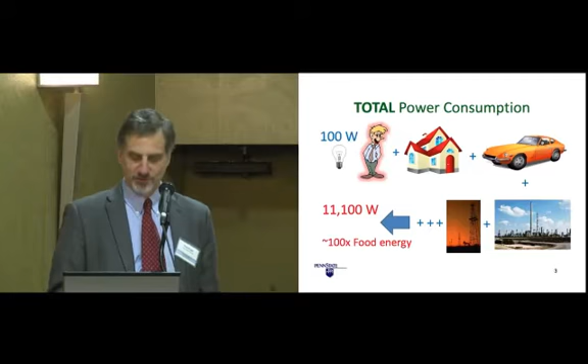So just think in terms about the food that we eat. If we were trying to do a real food bioeconomy, we'd need to grow 100 times more food in very rough terms. So what we've been doing is researching technologies that make use of the wastes we already make. These are microbial fuel cells, and the idea is that with no moving parts, we can convert organic matter into electricity. The only moving part in this case is that fan. There's no moving parts inside that microbial fuel cell.

And what's really inside there are just bacteria that are able to break down organic matter. Like you and I, when we eat, we breathe, we capture electrons out of that food, and then those electrons flow through our respiratory enzymes, and we make energy, and then we release those electrons to oxygen. We keep bacteria in a situation where they can't get at the oxygen, and so they can break down their organic matter and release those electrons to an electrode, where they flow through a circuit to the cathode. It's a thermodynamically spontaneous situation.

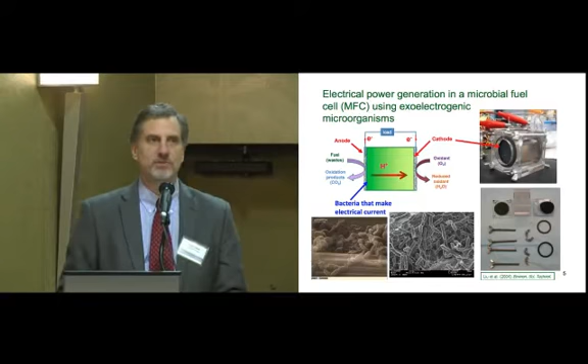And we can develop reactors that are very simple. This one, sort of like the average test tube of our laboratory, is more like 2 electrodes in a tube. It's very, very simple. Now, we've talked a little bit about the energy for wastewater treatment. We've gone in the direction of using more energy for wastewater treatment, using more energy for drinking water, due in part to using membrane-based processes, taking nothing away from Perry's talk today, which I thought was excellent.

But there's also a lot of energy in that wastewater, 2 to 5 kilowatt hours per cubic meter. And if you also look at the energy difference between a typical freshwater and seawater, there's probably another 0.75 to 1 kilowatt hour per cubic meter. Now that's not a high energy density, but we have a lot of water. And I'll talk also about creating artificial salinity gradients using waste heat.

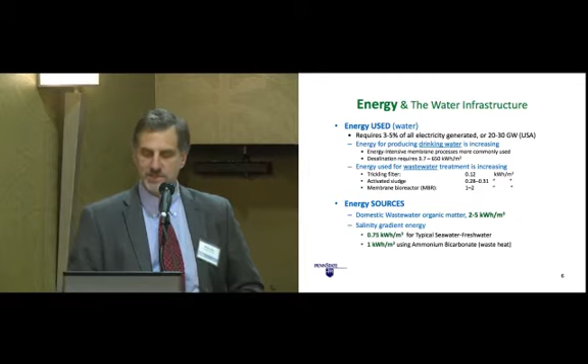Now, these are revolutionary ideas, and every idea goes through what they say is 3 stages. The first one's that of denial. It can't be done. And then, hopefully you work on it a little bit more and they say, well, it's possible, but it's not worth doing. And then you hope you get to the 3rd stage, which is where they say, I said it was a good idea all along.

Perhaps this has happened with different water technologies. Reverse osmosis membranes: nah, that's never going to work, too expensive. Membrane bioreactors: that's a foolish idea to put membranes in wastewater. That'll never catch on. And maybe microbial fuel cells will be that next area.

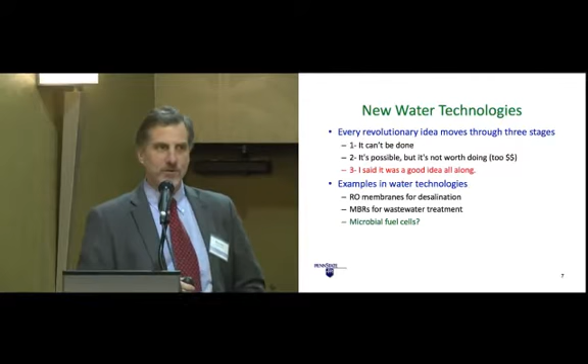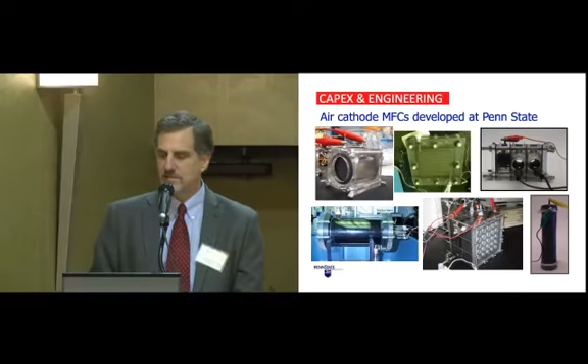So what I want to do is zip through some of the technology advances which hopefully will make this possible. We've made a lot of progress in the past few years, and so I want to give you a sense of that. We've built all sorts of these systems, looking all different ways, and here's what we've come out with in the end. Ways to make a very inexpensive architecture.

Some papers were written talking about how we needed to get these costs down below 100 euros per square meter or $150 per square meter, and we've done that. You start with the tank. I'm not going to put in the cost of the tank because everything needs a tank.

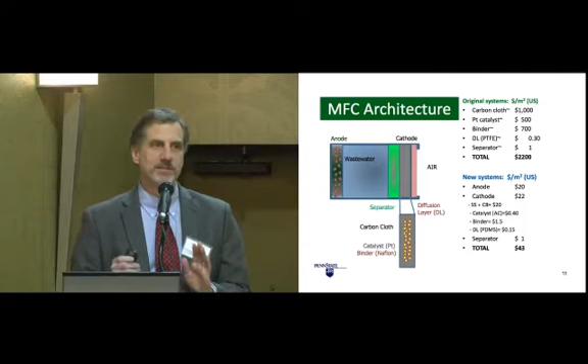You put the wastewater in that tank, an anode where the bacteria are going to grow, a cathode where oxygen is reduced. You want to have that done passively with air, and so you need something to make the water not leak out through the cathode. That's called a diffusion layer. And then you want to move your anode close to the cathode because that will create more power, but you don't want them to touch, so you put in an insulator or a separator between those two things.

Now, the cathode is probably the most expensive part of this contraption, typically made out of carbon cloth with some sort of catalyst. That historically has been platinum, and then some sort of binder, typically Nafion's been used. And so the challenge was that if you did all that, it cost you about $2,000 to build 1 square meter of this stuff, which is way too expensive.

And so what I'll do is show you that we can get the cost down to about $40 or $50 per square meter of materials, and I obviously won't go into those details, but let me convince you that we can do that. And the other thing is we got to make these things very compact. We have to put a lot of square meters of electrode per cubic meter.

And so the idea is to create different pathways for the water and very thin pathways for the air to create this sort of modular development where every square meter of module then meets with another square meter. And if each one of these is 10 centimeters wide, and you have 10 of them per cubic meter, you got 10 square meters per cubic meter, or if you got 100, you got 100 square meters per cubic meter, and so forth.

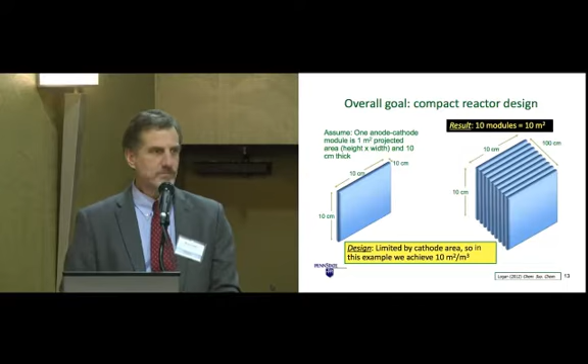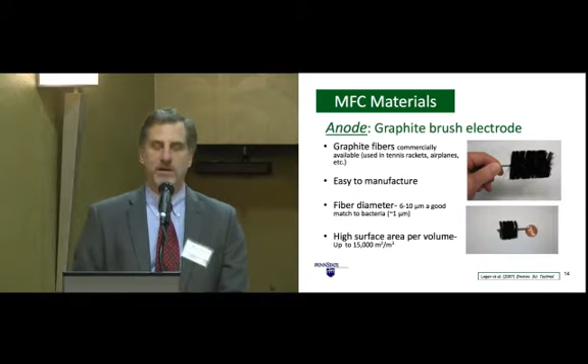So how do we make this system simple and affordable? The first was for the anode, we use something that looks like a bottle brush. It's just carbon fibers wound around a non-corrosive titanium wire. Huge surface area for bacteria, and very electrically conductive. So we can modify that design now that I showed to have these brushes about the system.

The second thing is we got away from needing to use platinum. Activated carbon, something environmental engineers know a bit about, but in a different context, activated carbon is actually a very good catalyst for oxygen reduction at the current densities that we use. And so these activated carbon catalysts work about as well as platinum on carbon cloth.

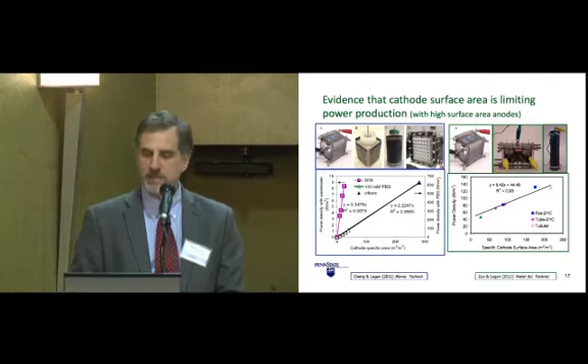The cathode surface area really becomes the critical design feature in the system, and that is that the more cathode area you put per volume, the more power that you make. And so we've shown this with a number of different systems. It's really a question about cathode area. So once you know how much cathode area you can put in the system, you can pretty much predict how much power you're going to make per volume. Let me skip that slide.

Now, activated carbon works well, but it doesn't last forever, and one of our big challenges was that over time we would see this performance for oxygen reduction creeping down, and these were some tests Fang Zhang did in my lab. She conducted them for about a year. I asked her to do this for 10 years, but she said no, so we only have a year of data.

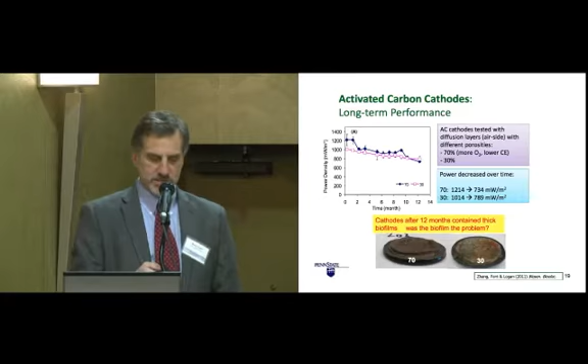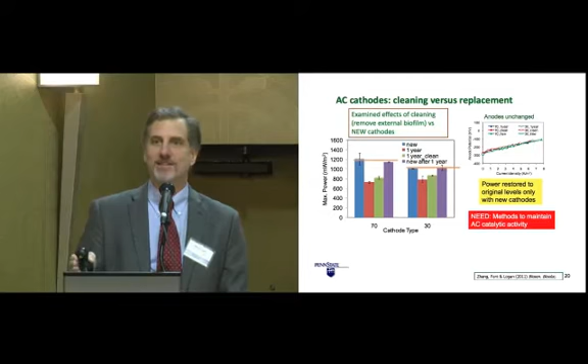And this is how the anode or the bacteria look. You don't have to worry about what's going on here, but basically this says that after 1 year, the bacteria are doing exactly the same job that they did a year ago. That is, nature, after a year, is still working perfectly. Our activated carbon cathodes, unfortunately, are not. So we need to improve, but nature has done well.

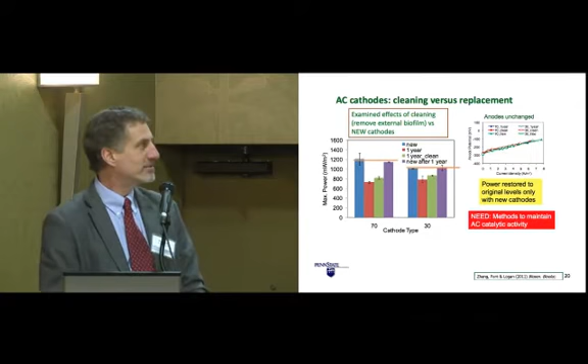So we're very optimistic about these new cathodes. The binders that people typically use to hold activated carbon or other catalysts together are negatively charged, which tends to get positive charge accumulating there, which rejects protons, which you don't want to do. We've created a new binder that over many cycles seems very stable and is actually much cheaper than the current binders. These would be the binders that would hold on the catalyst.

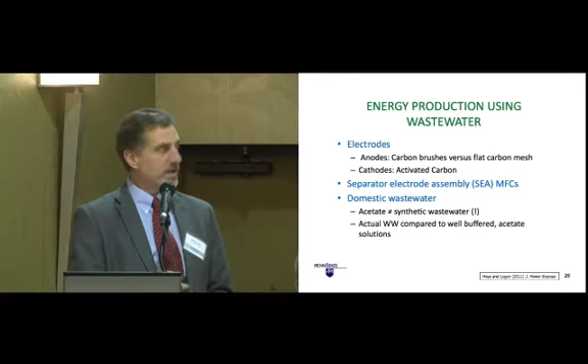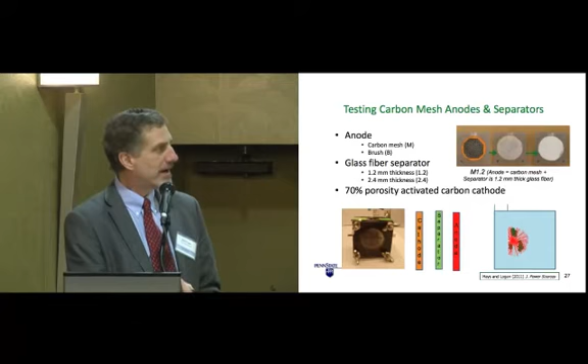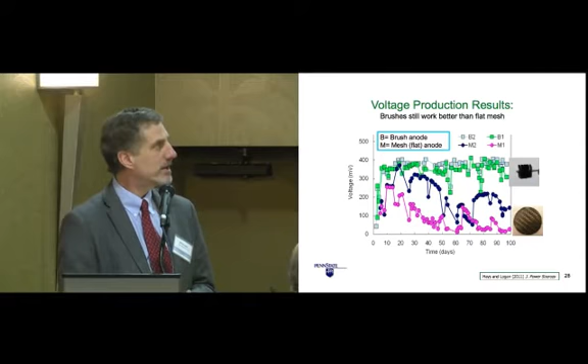So what else? Say we've done this now, we've got these materials, how well can it work on actual wastewater? So originally we looked at building one of these systems with flat anodes and flat cathodes and treating the wastewater. We compared it to our graphite fiber brushes, and we found that over about 100 days of operation, we got good continued performance out of our brushes, but this flat surface didn't work so well. So that told us two things. One is we could get good treatment on wastewater, and two, it would be stable over time.

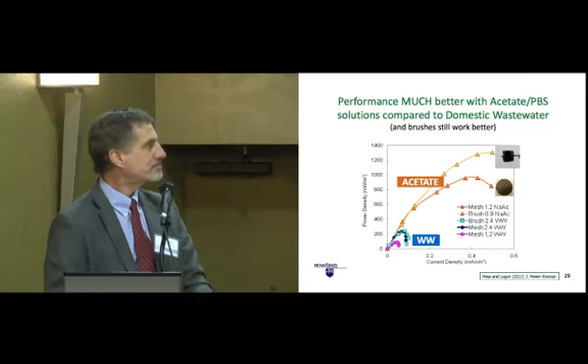However, wastewater is not acetate. Acetate gives us much more power than wastewater does. That's just got to lower our expectation about the kind of power we can get out of these systems, but we can get power out. These are some typical wastewater properties. I won't go into detail here other than to say it pretty much behaves as it should.

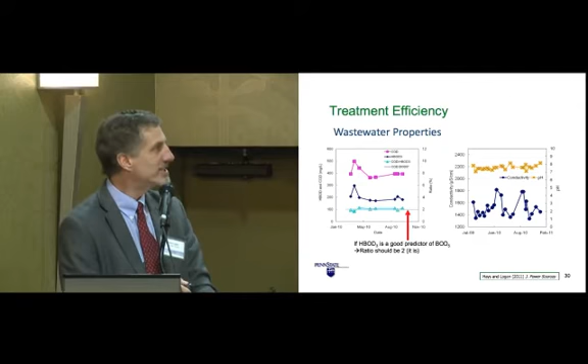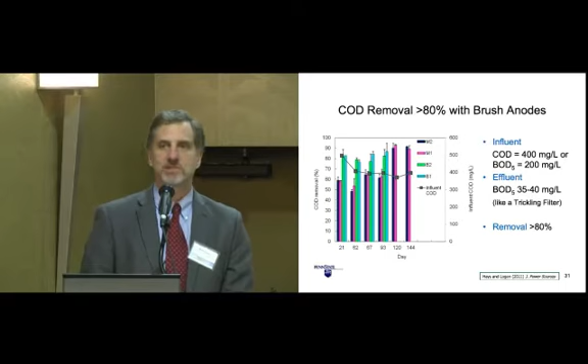And what sort of removals do we get? Well, our influent BODs are equivalent to about 200 milligrams per liter. Our effluent are not down at 6, but about 30 or 40 milligrams per liter. This is intrinsically a biofilm process, and so it behaves much like a trickling filter would in terms of getting soluble BOD out. Activated sludge gets low effluent BODs, but a trickling filter solids contact process can do the same thing. That solids contact process can drop the BOD down further. Perhaps we could do the same thing with microbial fuel cells.

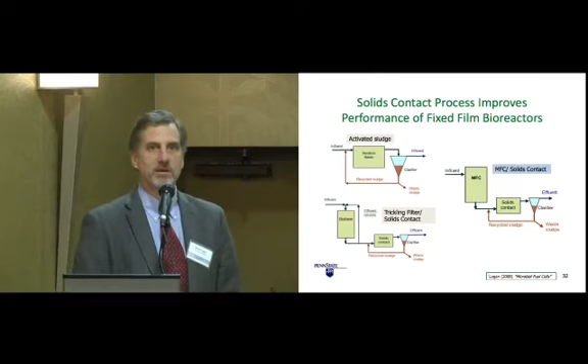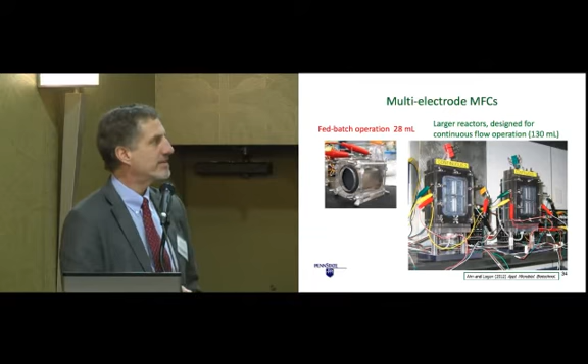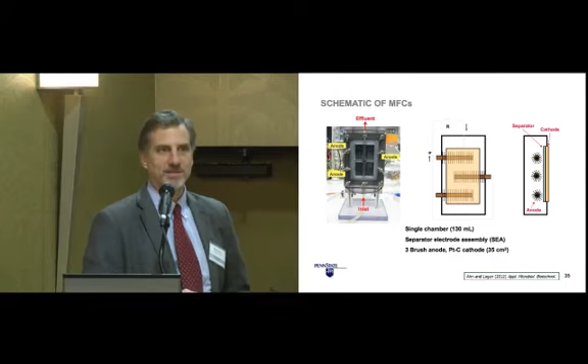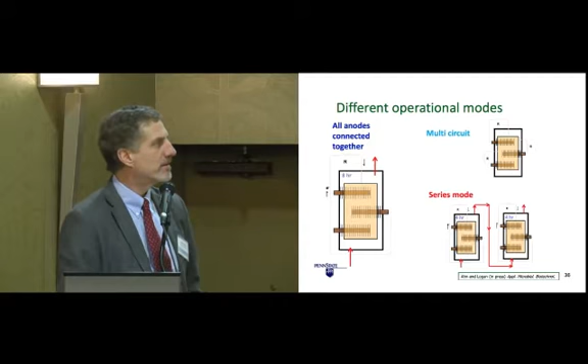And so we started to pack this reactor with many of these electrodes, and when we did that, some very bad things happened. Namely, it didn't work so well. So this is the system all wired up, all these anodes wired up together, and it produced very little power. And we didn't expect that, so we had to figure out why. So we individually wired these anodes to the cathode, so now we have 3 circuits, 1 for each anode. And then we tried flowing the wastewater through multiple reactors; instead of one 8-hour reactor, we have two 4-hour reactors. And there's our very little power part.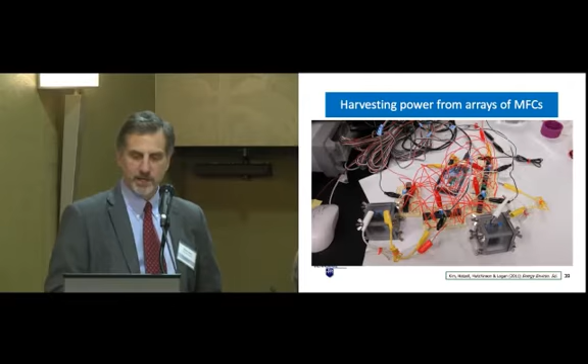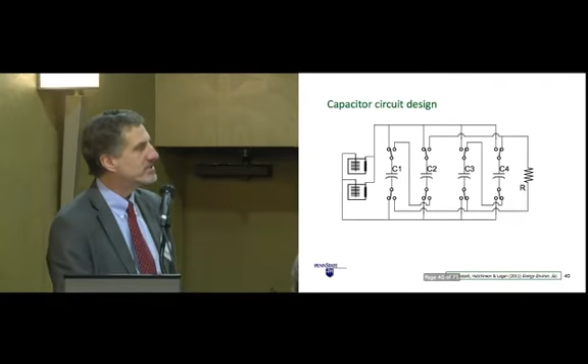Another thing we had to deal with was how to effectively capture power out of these systems. And so a couple of my research group came up with this idea, and this is sort of like throwing equations up here. Throw an electrical circuit up in front of a bunch of water people. But let me just say that what happens is these reactors charge two capacitors, and then we switch the capacitors to discharge. But we discharge them in series.

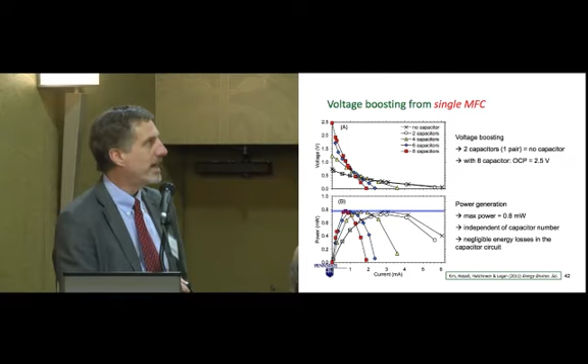And like batteries all linked together, you can increase the voltage. And so even a single MFC, instead of producing about a half a volt, can produce 2 or 2.5 volts, depending on the number of capacitors in the circuit. So we figured out how to harness this energy through capacitance systems and to effectively get multiple electrode systems to work.

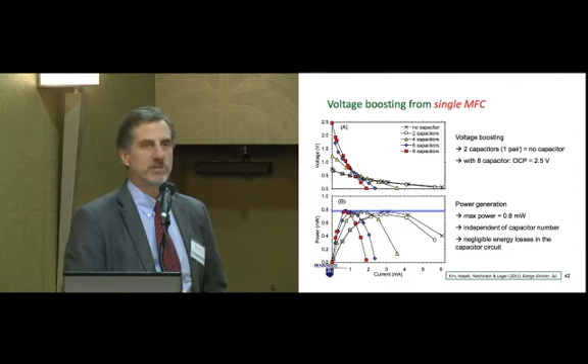One of the things about making electricity is it's still very cheap. And so the question becomes, how can you make a profit at doing this, or how can you break even for the cost of the electrodes if you're making something which costs very little? Well, we can get pretty high current densities, but the value of our product is not very high. So we thought, well, what if we make something worth more, like hydrogen?

If you take one of these microbial fuel cells and you take away the oxygen in the system, nothing happens. But if you add a little bit of power, that is, you add some voltage to the circuit, actually you can evolve hydrogen gas at the cathode. So this is a way, as Bruce was talking about, to use this microbial fuel cell type technology to make hydrogen. And actually, it's a much simpler system to make hydrogen than to have oxygen reduction on the cathode.

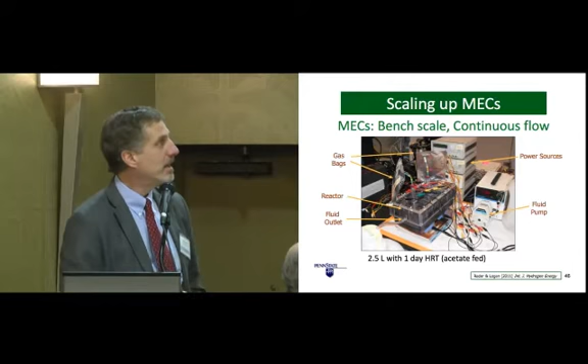We've built some of these reactors in the lab here. We have built reactors around about 2.5 liters for this one, made of multiple anodes and multiple cathodes. We've built a larger system, and we tested this at a winery in Napa, California, and that's what you do at Pennsylvania. If you don't want to be there in the winter, you go to California and test your ideas at a winery.

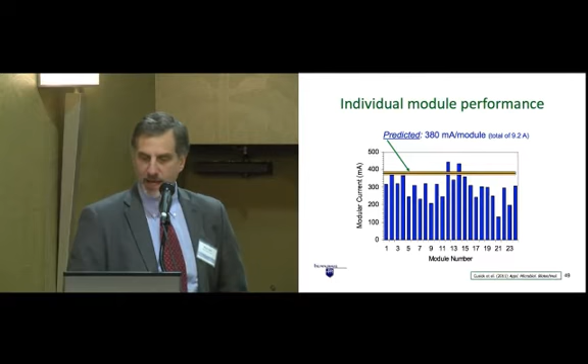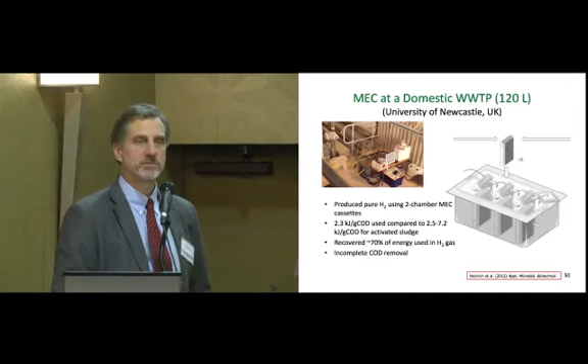These are the 24 modules, and you can see our current densities weren't always what we'd hoped for, but we were doing pretty well there, and we were treating the wastewaters. And a group in Newcastle has also shown this idea; they put this microbial electrolysis cell on a wastewater treatment plant, and they were able to produce hydrogen from domestic wastewater as well and treat the wastewater.

So the last part of my lecture, I got 8 minutes left there. Yeah, close enough. Good. Okay, good.

So the last thing I'm going to do is, now I've told you about the microbial fuel cells, or the microbial electrochemical technologies, let me tell you how they meet salinity gradient energy. Salinity gradient energy is the energy you could extract where fresh water flows into salt water, and that's been estimated to be globally somewhere around 2 terawatts available, with maybe 1 terawatt that we might possibly harvest.

And there's also a lot of energy in waste heat. Every power plant that puts out a gigawatt of electricity wastes 2 gigawatts of waste heat. So we ought to be able to find better ways to capture that energy. So salinity gradient energy. You've got salt water.

But there are lots of places where you have fresh water flowing into the sea, or you have, for example, wastewater flowing into the ocean. Now, if you put that on a hydro energy basis, like water flowing over a dam, how much energy difference are we talking about between these two sources? Well, that fresh water flowing into seawater is like water falling over a 270-meter high dam, or almost 1,000 feet. That's the energy that you could capture.

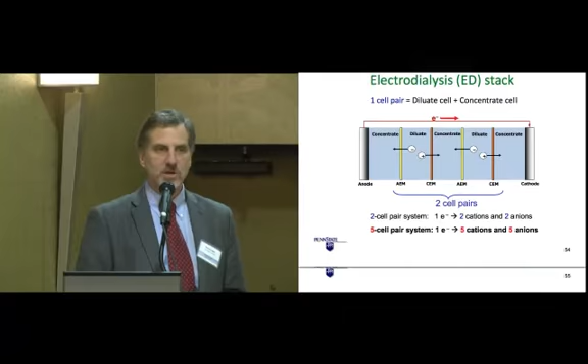Reverse electrodialysis is, well, the reverse. You put seawater in one cell and river water in the other cell, and anions can only go that direction, and cations can only go in that direction. And that creates an electrochemical potential of about 0.1 to 0.2 volts for every pair of membranes. You can harvest electrical current by linking these membranes together, much like you can just link batteries together.

So you take a series of these membranes, and if you have enough of them, you could split water on one side, releasing oxygen at the anode, and turn the electrons and protons into hydrogen at the other electrode. This has been known for a long time, but you need a lot of membranes to do it.

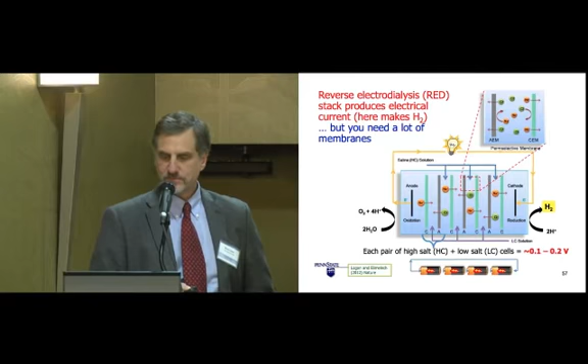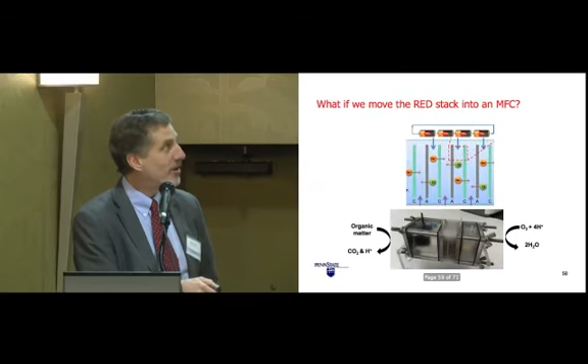So we thought, well, what if we took this stack and we took just a few of these membranes and we put them into one of our microbial fuel cells and made it into what we call a microbial reverse electrodialysis. Now you know why we say it MRFC. So MRFC is an MFC with this stack inside of it. And we tested this idea out to see how well we'd capture that energy.

And when we put it in the microbial fuel cell, instead of making a half a volt, we made 1.3 volts because of the stack potential. Instead of making about a half a watt per square meter, we made 4.3 watts per square meter. And the energy efficiency, 42%, well, that's better than a power plant burning coal.

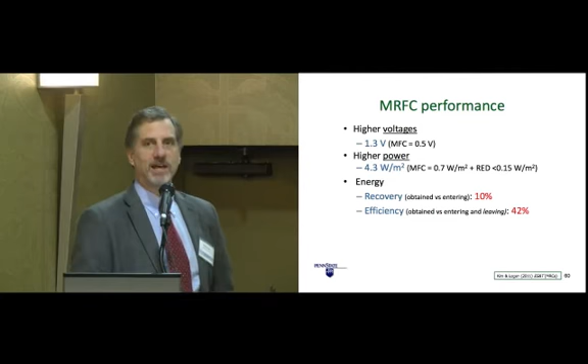Last point then is waste heat energy. How can we possibly use these ideas to capture energy from waste heat? If you start with a solution like ammonium bicarbonate and you apply a low waste heat to this system at temperatures 40, 50, 60 degrees C, below boiling, you can distill off the ammonia and the CO2, much like you distill off alcohol out of water, except you have to boil the water. So this is much lower heat.

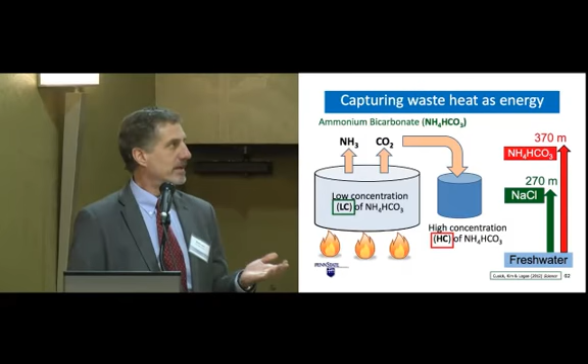So you condense out those materials, you create a high concentrate, the water that's left is your low concentrate. So you've just taken that waste heat and made a salty and a non-salty solution. And if freshwater-seawater is a 270 meter tall dam, then this one is a 370 meter tall dam or more. And we tried this idea out on wastewater, domestic wastewater. We put the stack into the microbial fuel cell.

And we found out that instead of making that much power from wastewater, we made almost 3 watts per square meter, almost 10 times what we were producing before. And something scientifically amazing happened. It's like Perry saying, we didn't expect the GAC to clean the membranes. We didn't expect this to happen. Our electrode potential stayed nearly flat.

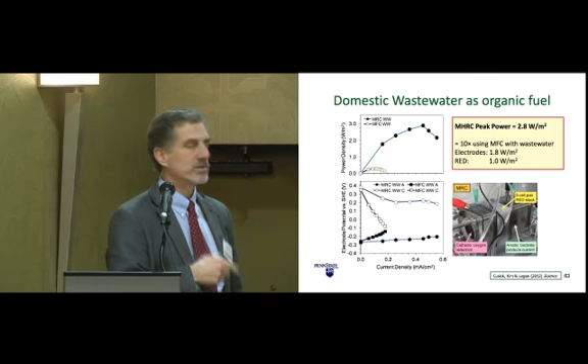And what that means is you can produce more and more power for as long as you keep these things flat. When they start going up and going down and meeting each other, then power generation stops. And so we found out that we could not only make a lot more power, but we also could do it in a lot less time. So that gives us a potential to make electricity.

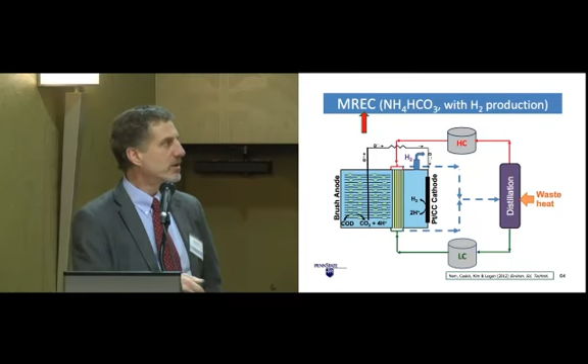We can also use this ammonium bicarbonate as our sort of energy source to make hydrogen. That means that instead of having to go to an electrical grid energy source and get that voltage we need, we can get that voltage from the stack. And indeed, we've done some tests which show this hydrogen production with no electrical grid energy.

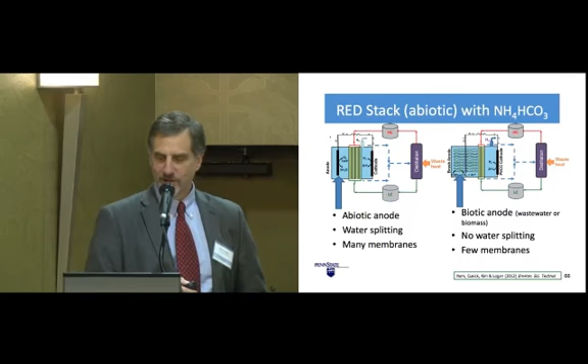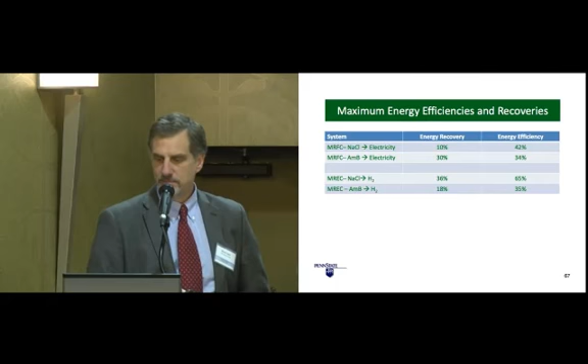This can be done, of course, abiotically or biotically, but we think that the biotic routes have a way to form useful products from a cheap source of organic matter, which we currently call wastewater. The energy efficiencies can be very high. We've gotten as high as 65% energy efficiency in some of these systems, although quite distant from wastewater, but it shows great promise.

So I just want to finish up and say I think we now have these materials that we can use to make these systems. We don't have operational experience. We don't have enough experience building these larger systems, but we need that. And the salinity gradient energy is just a whole new thing that we ought to be thinking about anytime we throw fresh water into salt water.